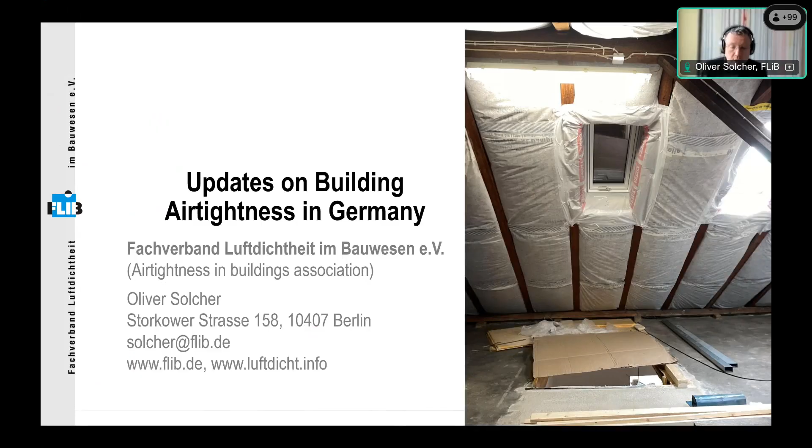My name is Oliver Solcher. I'm the manager of the Association in Airtightness in Buildings in Germany. And I shall give you a short overview, as I did it in Build Air, of what's going on in Germany. It will be like a flight over what's going on.

So I start with the Building Energy Act. That has not been changed, not yet. We all wait on it. As you might have heard, we had a change in government in 25, and we all wait on the new positions. But what I feel is that in airtightness, there won't be any changes. What you see is that we have a distinction between the airtightness that has to be achieved while building a building, and that is mandatory. You need to build airtight, but it is not mandatory to test.

If you test, you can use that figure in calculating the primary energy demand of the building. The benchmarks that you need to achieve are distinct, as we discussed before, the QE50 and the NL50. It's easier to achieve a good NL50 or N50 value in large buildings.

So the benchmark for buildings with an internal volume larger than 1,500 cubic meters is a QE50, so it's the leakage flow divided by the surface of the building, and we differentiate between buildings without mechanical ventilation and with mechanical ventilation. With mechanical ventilation, the benchmarks are a little higher. For smaller buildings below 1,500 cubic meters, you have benchmarks in the NL50 value. Why don't we have the N50 value? Because we have a different internal volume. In our national annex, we define that our internal volume does not include the building construction.

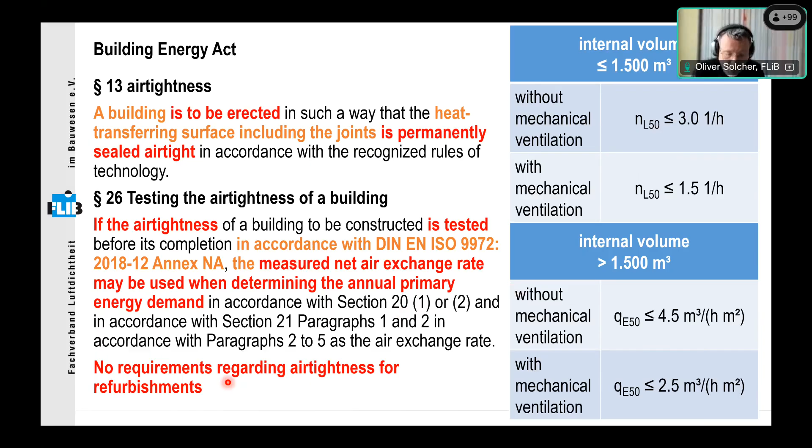And what's kind of sad is that we have no requirements regarding airtightness in refurbishment. We have federal funding, and the federal funding also does not make airtightness testing mandatory, just if it is used in the EP calculation or if you want to build in a certain energy efficiency class, like with renewable energy. But the airtight design is mandatory. You need to design the building airtight, and the energy consultant must give an airtightness concept. And also a task for the energy consultant, there needs to be evidence of the airtight execution.

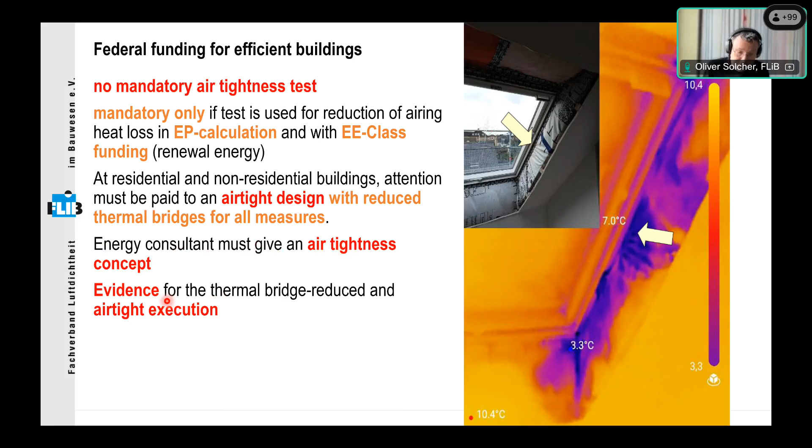We had a coalition agreement in 2025. So, as I said, we wait for a new government. And so I quote from that agreement: we continue to promote energy efficient construction and refurbishment. As we all know, the energy savings are in the refurbishment, not in the new buildings. We will not tighten the current regulatory requirements and will evaluate their effects. This, looking at the EPBD, is something that concerns me. And we will continue to support new technologies for even greater energy efficiency in buildings, and continue and bundle state funding for energy counseling in the building sector, like energy consultants.

The picture that you see is a refurbishment that has been brought from an NL50 of 13, just by refurbishing the roof, to an NL50 of 2.2. So you see what potential there is in refurbishment.

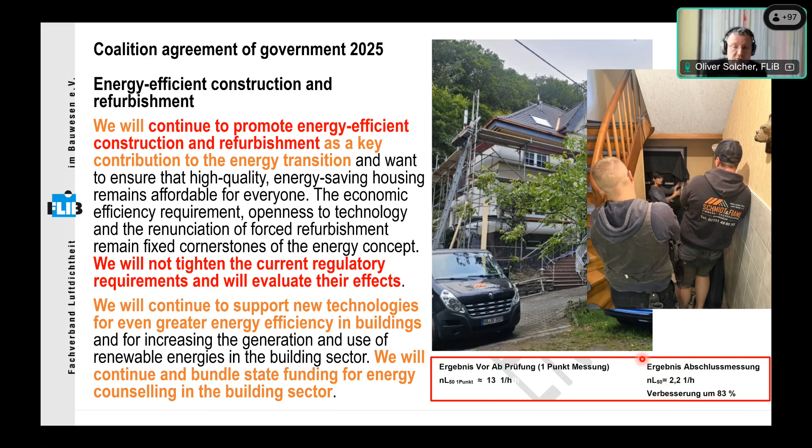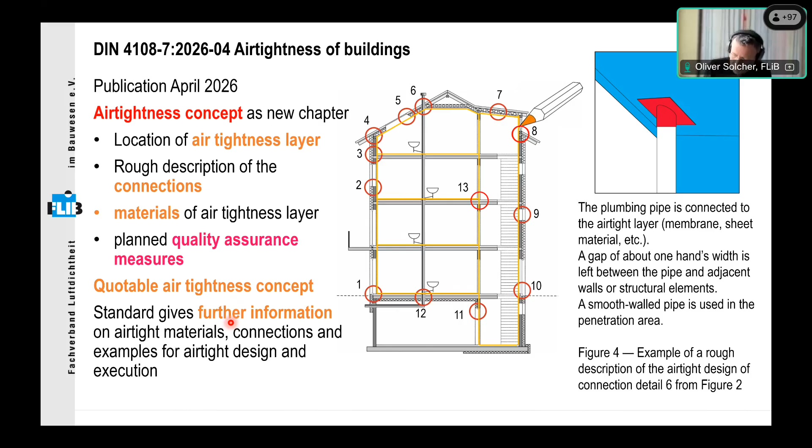The airtightness concept has no known standard. In April 26, we will have the new DIN 4108-7, and there we introduce what an airtightness concept is. You need to have the airtightness layer. You have a rough description of the points that need to be designed in a certain way later on. The materials need to be mentioned. And what's pretty important for me is you need to define the quality assurance measures, if planned. So with that standard, we have a quotable airtightness concept. As you have seen, it is mandatory in our funding programs. And of course, the standard gives further information on planning airtightness and airtight materials. It's just a short introduction on that standard.

Also in 26, the WTA guidelines have been published dealing with airtightness in existing buildings. How do we deal with that? We have three parts: the general principles of planning, detailed planning and execution, and the measuring procedure. And this is one goal of the FLiB, that it's not just one test. If you just measure at the end, you cannot improve. It's just a measuring result that you put in the EP calculation. But the goal should be to make the building better, make the airtightness layer of the building better.

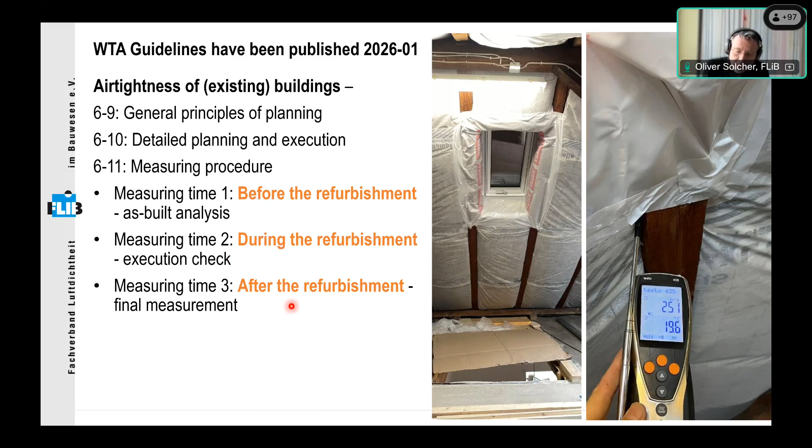So to evaluate the building, a test before refurbishment has been introduced. Then during refurbishment, that's for me the most important test. And after refurbishment, to get a value for NL50 or QE50. The goals of the FLiB: support airtightness testers, planners, and craftsmen. Main focus on roof refurbishment.

We try to introduce airtightness, as it is questioned in Germany, and we chose a trade where airtightness cannot be questioned. If you renovate a roof, if you put insulation in, airtightness is beyond question. So you have a good example that trades need to work together in order to achieve a good result. And airtightness is mandatory, because moisture rises in the building, so the moisture will go through leaks in the roof, and you of course have many ducts going through the airtightness layer.

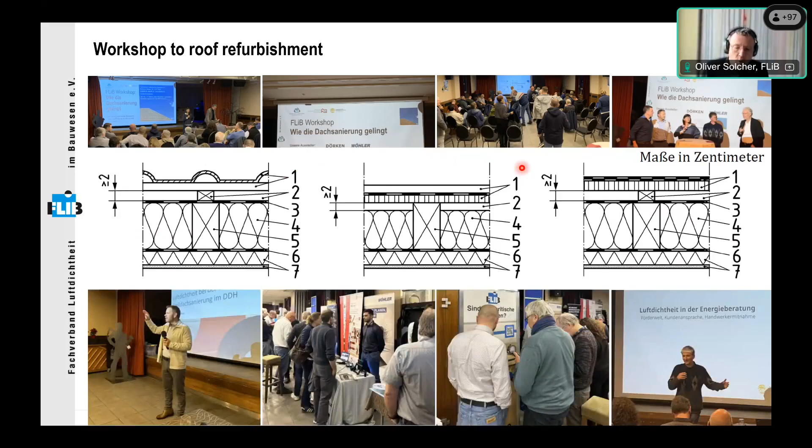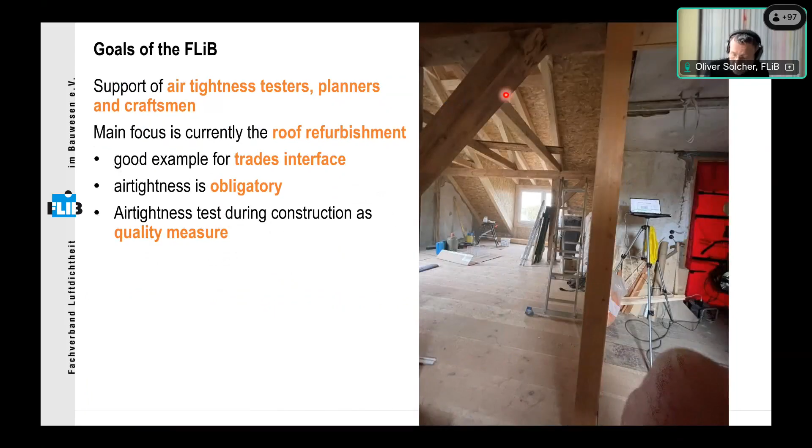We work with workshops to introduce that, especially for energy consultants and craftsmen, and the goal is that we have a planned airtightness of the building, not just the material, but the details, as you see on this slide. You have smoke coming out. The roof is great. You see it here, but the connection to the outside wall is still a leak. We want to have the airtightness measurement during construction as a mandatory thing. And so you see here our goals.

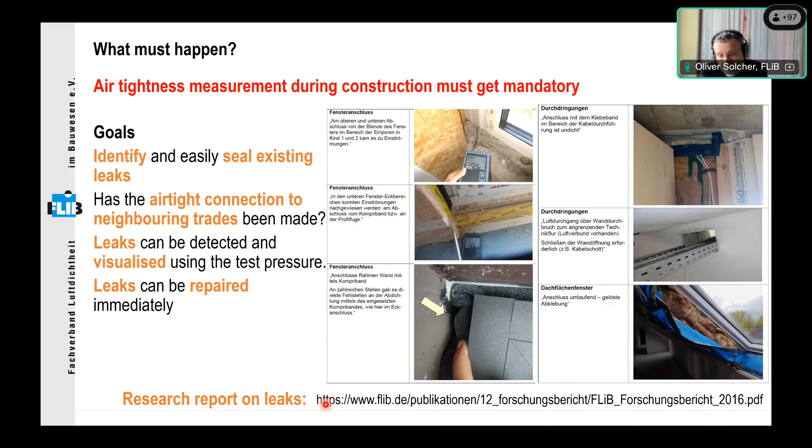And if you want to learn more about leaks, I have here a link to a research report. It's a little old, but still valid. Don't be confused by the date.